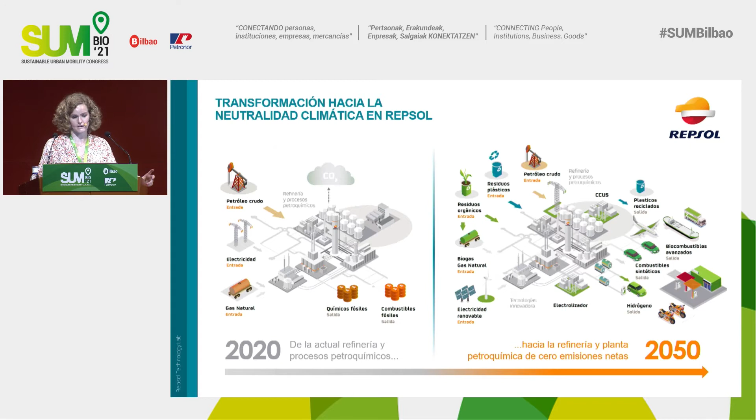In today's session, I'm going to speak about net zero emission fuels as a new alternative to decarbonization in transportation. As you well know, Repsol is transforming itself towards carbon neutrality. We want to travel from the current reality, in which we are based in oil and fossil fuels, into a new reality where we have sustainable and carbon neutral products.

When we speak about zero net emissions, we quickly think about hydrogen and electricity. If electricity itself or hydrogen are produced with renewable energies, we can actually consider that those are zero emissions. But there are alternatives to those which present several advantages versus hydrogen and electricity. It's true that we need to invest in the production of hydrogen, and for hydrogen itself we need to invest in infrastructure and the vehicles, whereas for liquid fuels, we already count on the infrastructure and the vehicles themselves. It's true that we'll have to invest in generating that energy.

We do have biofuels, which are currently incorporated in any fuels that we can buy on the market. The more usual ones are the first generation biofuels. Those biofuels can reduce the carbon imprint up to 60% versus mineral oil, and they compete with oils used for food. But legislation has changed, and we have a tendency to obtain biofuels from waste. And if they are made using renewable energies, we can go up to 90% or even further of net zero emissions. We could actually get to a negative carbon emission.

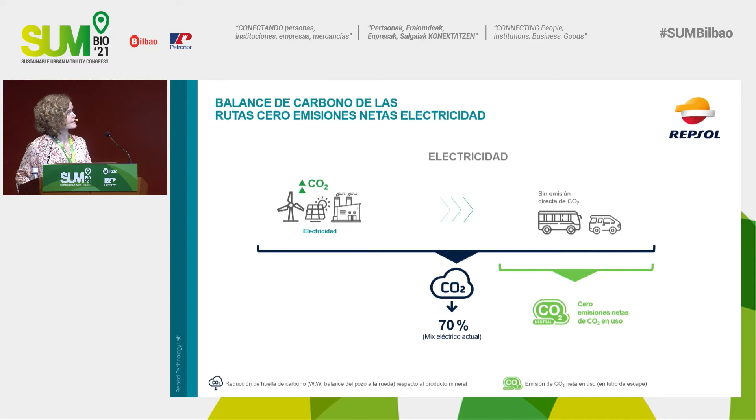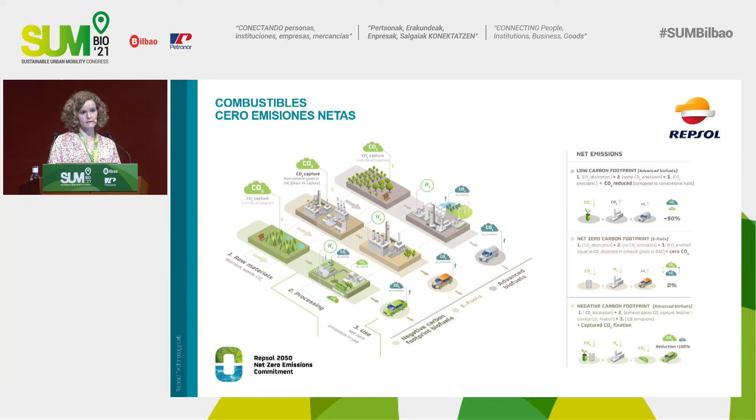Our goal must be to decarbonize, so we have to take into account the whole process from the cradle to the tomb. This is the product portfolio that we want to achieve with the different technologies for carbon capture, waste use, etc. We could actually get to negative carbon imprint fuels.

So the problem with carbon emissions is a global problem, so we need to have a global solution for it. We should not just stay at the stage that we are with the current legislation. When we think about exhaust pipes, we have to bear in mind the whole value chain: the manufacturing of the vehicle, the production of the fuel, the emissions at the end when that fuel has been used by the car. So we have to do some life cycle analysis, bear in mind all stages of the use of those products.

But, you know, there's a huge electric intensity used in the manufacturing of batteries. We hope that in the medium term, that intensity will be lowered. That means that for the whole cycle, soon these technologies will be similar. So that will leave several niches for application for the different technologies at that time.

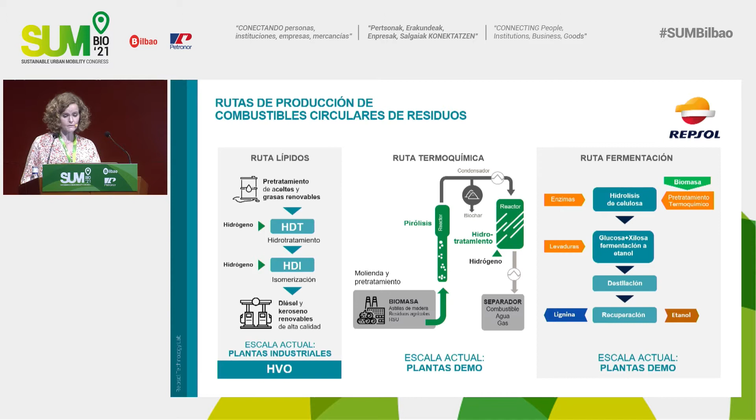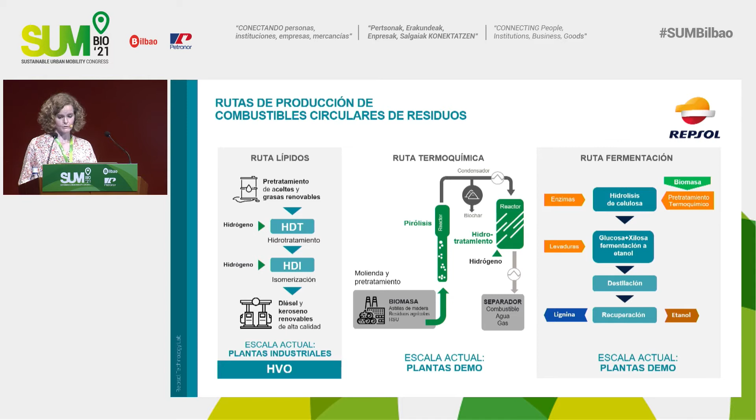The other way, the thermochemical or pyrolytic one, using pyrolysis and hydrotreatment, we go from biomass to fuels which are very similar to the ones that we use right now. That type of plants are at an earlier stage. They are at demonstrative stage, and they need to be escalated to industrial production. And then there are fermentation ways whereby we produce alcohols which can be incorporated to gasoline, and they also need to be scalable.

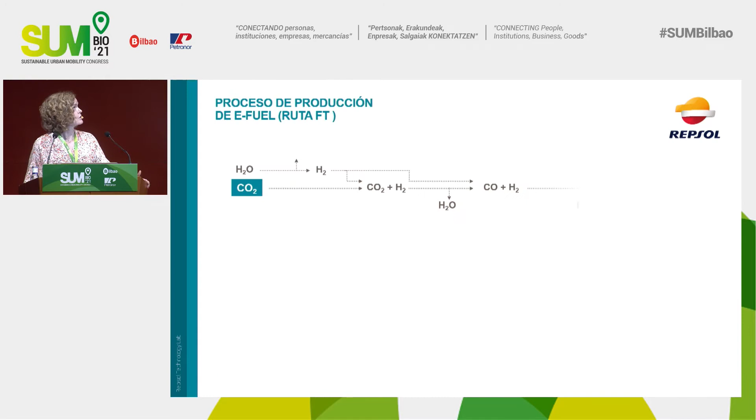One of the keys to the use of this type of technologies is the availability of waste. We have a variety of organic waste that can be employed for the production of this kind of fuel, such as waste oils, solid recovered fuel from waste, the organic fraction of RSU, and the biomass. It is true that these resources are quite limited, so we could not cover the whole demand by using them exclusively, but there are some alternatives to those, as I was saying before.

These are synthetic fuels, also called e-fuels. There is a great availability to produce those, considering CO2 and water as raw materials. We can use renewable energies. We can obtain hydrogen from water by electrolysis, and we can take CO2, capturing it in industrial processes or getting it directly from the air, through two different methods, as you see, RWGS or Fischer-Tropsch.

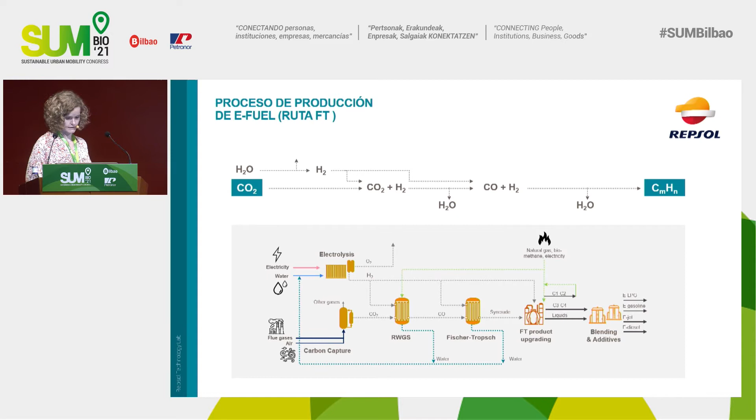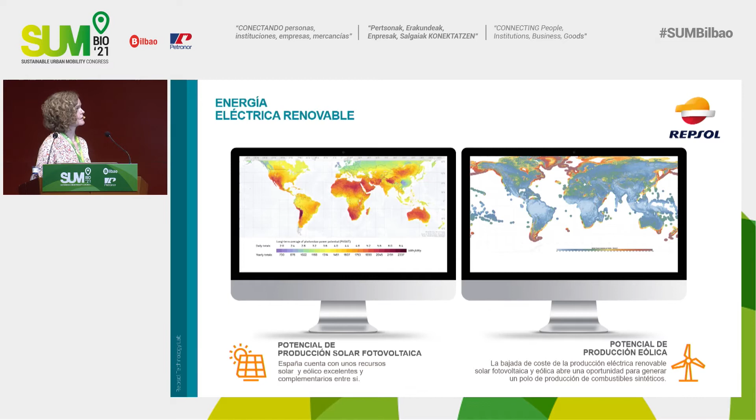And we would treat those in a similar way as we treat raw mineral oil today, and we will obtain similar products to the ones that we have now, which are totally compatible with current technologies. The advantage that we have in Spain for that type of fuels is the great potential for generating renewable energy, either by solar PV or by wind power. They're complementary. They enable us to have a quite stable supply of that type of energy.

And how is this kind of fuel? I was saying that it's similar to the fuels that we have right now, but there are some differences. The quality of the fuels used today is regulated by a framework, and that's not the same regulation regulating paraffinic fuels like the hydrotreated ones or the e-diesel, the synthetic diesel. Those are regulated by the EN 15940 standard, and there is a higher cetane content.

The lubricity features are a little bit worse because of their paraffinic nature, but they're regulated to some levels in which there are not going to be any problems for the engine. Cold properties are very good, below minus 20 degrees Celsius, and it is also a very stable product.

The problem with diesel oil is that it's not very stable. It gets oxidized, so it gets degraded. We could also include FAME or biodiesel in these fuels, and the sulfur content is also very low. It's similar to a diesel fuel, to a gasoline.

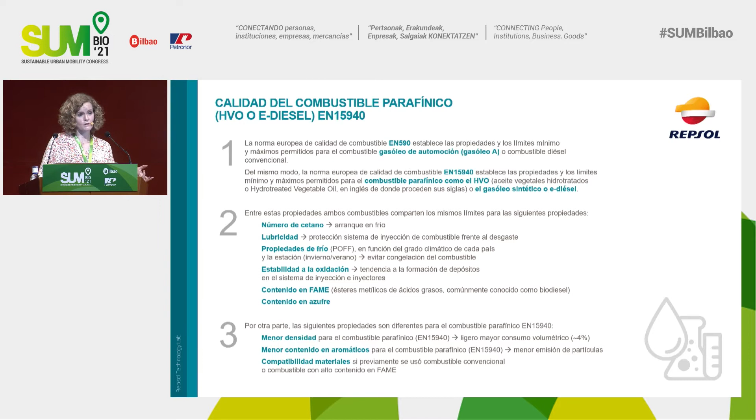It's similar to conventional fuel, but they're not the same. Conventional diesel actually makes engine joints swell. If we use paraffinic fuel after using regular diesel, those joints could actually decrease in volume, and that could actually lead to some leaking. There is a lot of technical work being implemented already, and their engines today are actually compatible for that type of double use.

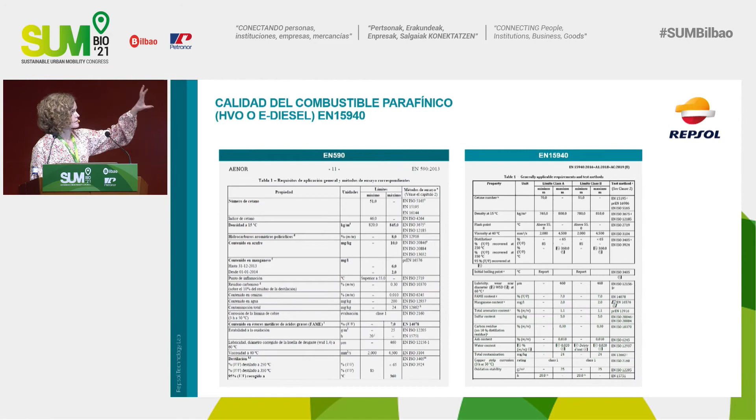So this is the legislation. It's just an outline of both norms, and that's basically all. As I was saying, one of the key points for these type of fuels is their compatibility with existing vehicles. That's one of the greatest advantages that these fuels have. As I said at the beginning, we'll have to invest in generating energy, but we do have the infrastructure already, and we have the vehicles already.

We'll have to do some adjustments, but an increasing number of vehicle manufacturers indicate that their latest models are compatible with paraffinic oil. They usually indicate it by using the XTL name. That means that it's compatible with HVO and with e-diesel.

That means that we'll be able to use this paraffinic fuel directly in our vehicles without any need for extra maintenance. We will have the same power, the same torque in the vehicles, and we will have no problem using the vehicle during cold temperatures or at the start of the engine, and there's going to be a low tendency for the accumulation of deposits.

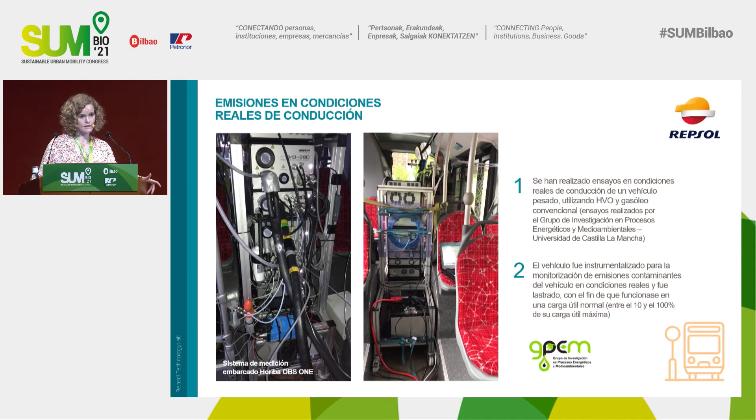Regarding the tests that we've been doing with the University of Castilla-La Mancha, as I was saying before, those have been real drive testing conditions using one of the vehicles that have participated in the pilot plant. We've been measuring for 3 days using conventional diesel fuel and HVO fuel. The vehicle was completely instrumented in order to monitor those conditions. And obviously, we put some weight on the vehicle in order to abide by the test regulations as well.

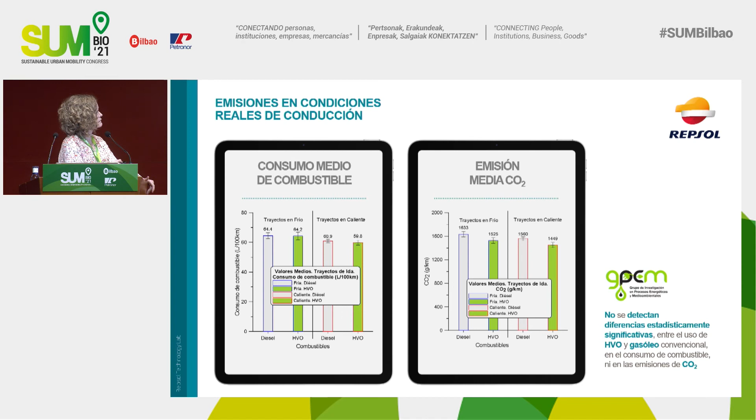So the result is that there are no significant differences between the consumption or the carbon emissions between one type or the other type. You see, the green part is HVO, and the conventional diesel is actually the white stripes there. So they're equivalent. And for carbon monoxide and non-burned hydrocarbons, that's exactly the same. So for those polluting emissions, there's, again, no significant difference between both fuels.

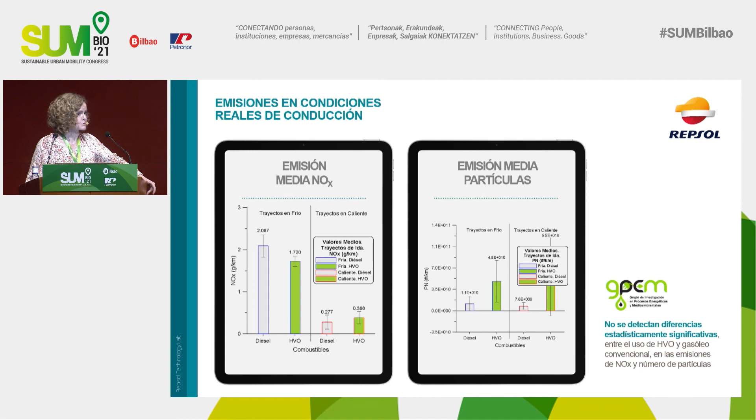NOx emissions, particulate emissions, same thing here. We do not find any significant difference. So we can safely say that both fuels behave in a very similar way. What are the conclusions then for this pilot project? Well, the conclusion is the one we were looking for. HVO and conventional diesel behave in a very similar way.

So operation was very similar. For the management, stocking, and use of the fuels, the driving of the vehicles has been similar. ALSA has certified that. They have detected absolutely no incidents regarding that. And these tests have been monitored by the University of Castilla-La Mancha, and they have certified that there is no significant difference either in the polluting emissions or the CO2 emissions.

So we've substituted a mineral oil by a 100% sustainable or renewable fuel, and the result is that nothing has varied except for the reduction of over 80% of CO2 emissions, which was the original goal of this project.